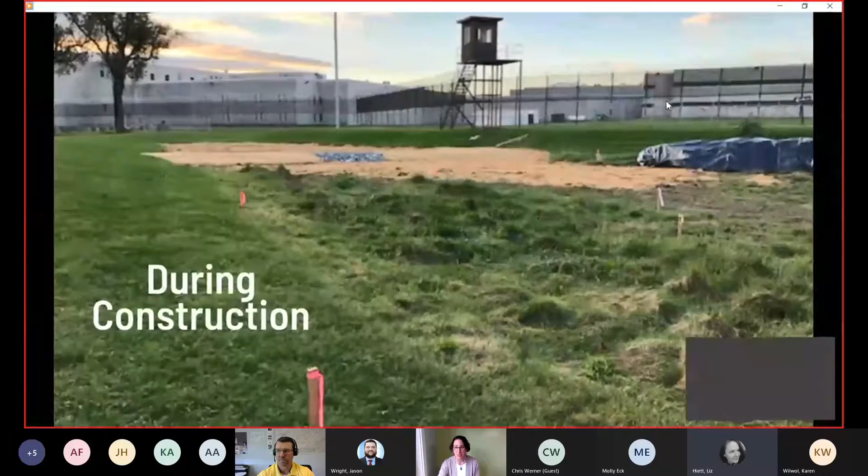I don't know what you're seeing, but this isn't quite the video we had sent in. So how about we just forget about the video and go on with the presentation? Is that all right? Yeah, that seemed fine, to be coming through very well. Okay. Yeah, I'm not sure how we mixed up the presentations, but yes, if you'd like to go ahead with your presentation.

Oh, was that not the one? That was the one we have from you guys. It was our video, but it wasn't playing correctly at all. It was just playing the first two slides over and over again. Oh, huh. It looked good on my end. On mine, yeah, it was good. Maybe it was your connection. Sorry about that. Can end it if you want, whatever you want. It was an awesome video. Can you play it again? Sure. Yeah, Lindsay worked so hard on it.

Okay, here we go. Lindsay, you need more bandwidth. Do you want me to start it from the beginning or where we were? Yeah, start it over. Okay, hold on one second. Thank you. Hold on one second. I like the music too. The music was getting me going.

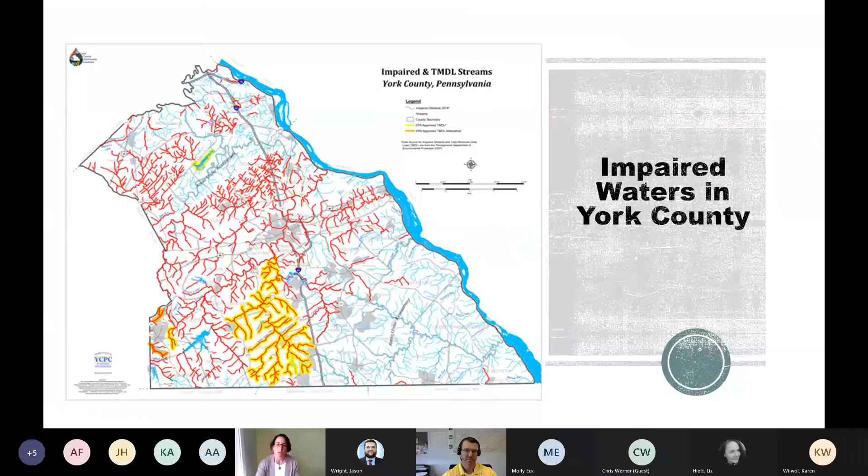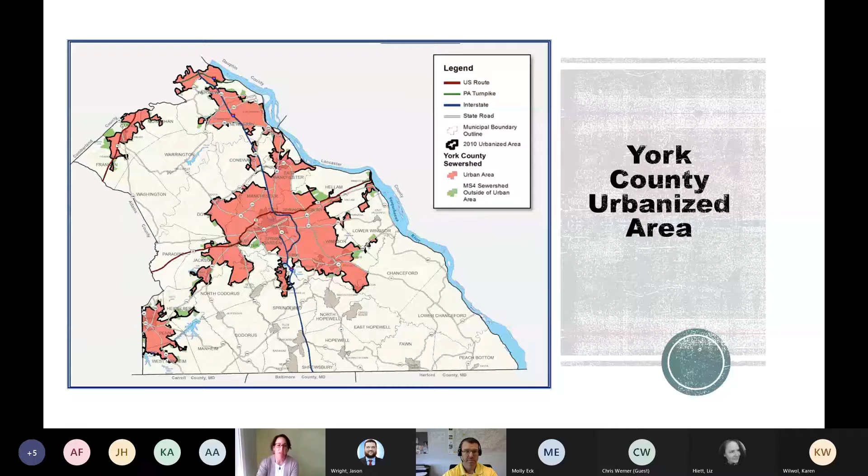So looking at that, we'll go to the next slide. In our urbanized area, all of our municipalities that had to have an MS4 permit and were required to do a Chesapeake Bay pollutant reduction plan, we decided to do a regional plan.

If you go to the next slide, with our regional CBPRP for the first one, there were 43 MS4 municipalities, and the county also had a permit and was required to do a CBPRP. Most of those municipalities participated, and the county was looking at ways we could contribute positively to reduce our reduction.

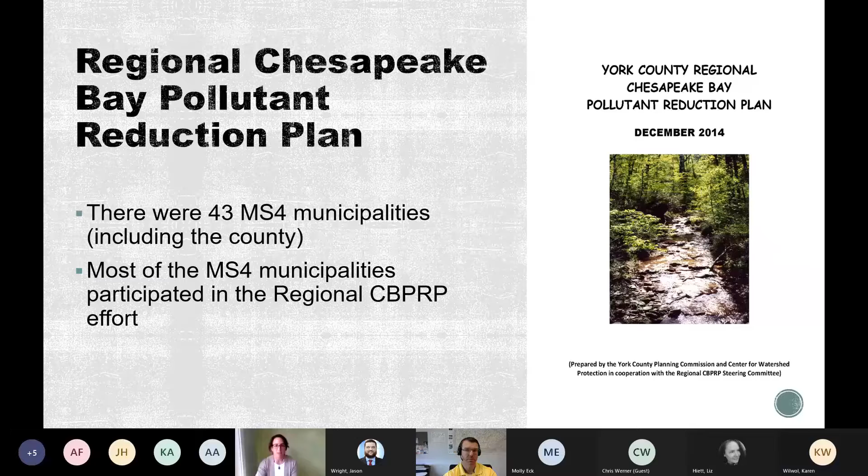Next slide. We had seven properties located in MS4, or we owned properties in 7 of the municipalities that were participating in the CBPRP. The reason for our MS4 permit was some outfalls, and the only population we really had was the prison. So we formed a committee to help with our MS4 permit and all of our MCMs.

We worked together with our facilities management and their staff. It was the YCPC; we had the county engineer involved, and our most significant place where we owned land and had basins and outfalls was the prison. So our prison staff was also involved in our committee. We looked at where we could make a difference, and next slide, we decided it was the prison.

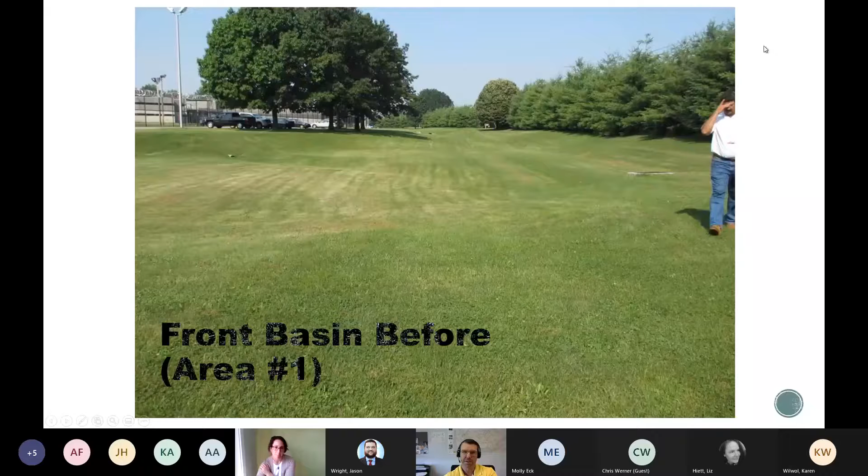I just noticed that cameo appearance by John Seitz there on the side of the picture. Yes. So yeah, Seitz was on our committee.

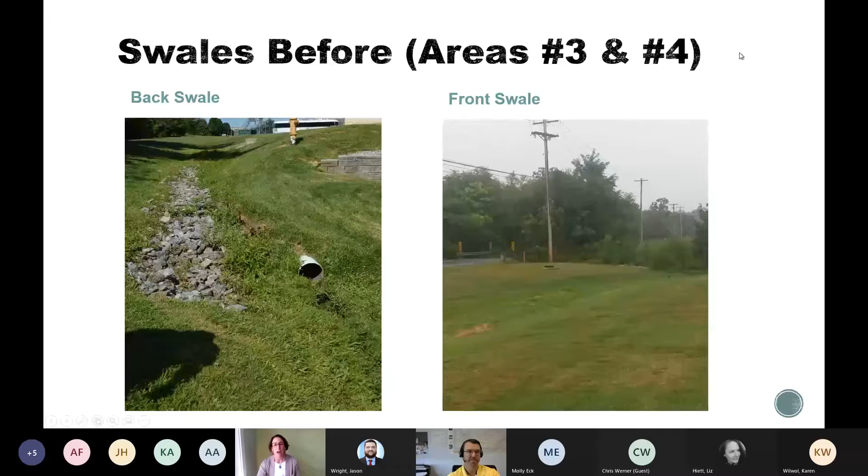And so our goal—the picture on the left was the back swale that was actually leading into the first basin—as the Planning Commission, next slide here, was to hopefully eliminate the need for our MS4 permits, the ultimate goal. If we could reduce or eliminate those discharge points, or at least be proactive in eliminating some stormwater and pollutants going into our streams.

So here's the timeline. It's a pretty lengthy process. In 2014, we had the CBPRPs. That's when we adopted it.

2015, the next year, we applied for the DEP Local Stormwater BMP Implementation Grant. The next year, the grants were awarded. Fun little fact, the awardees were talked about at the prison, so that was kind of fun.

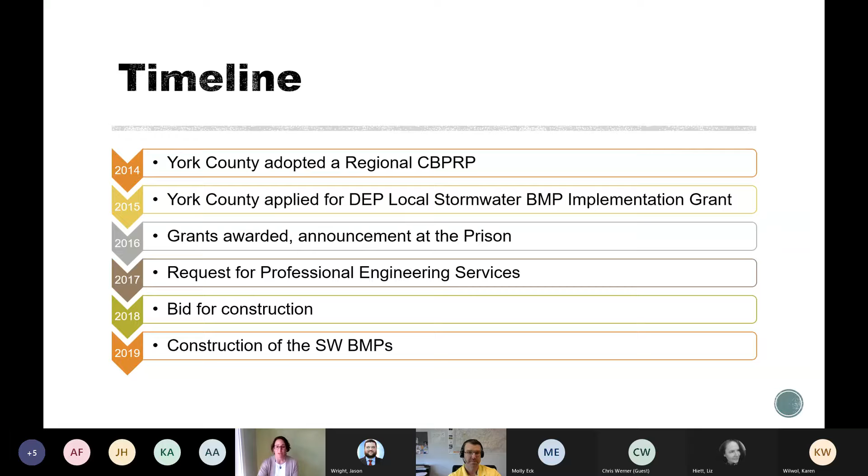Obviously, removing the pilot channels was one of the key factors in the project approach, to increase the residence time, lengthen that flow path within each of the basins, but also to create some more native plantings and additional capability for the basin for evapotranspiration and water quality treatment, which were really the driving factors. I'll get into that a little bit more as I go through my part of the presentation.

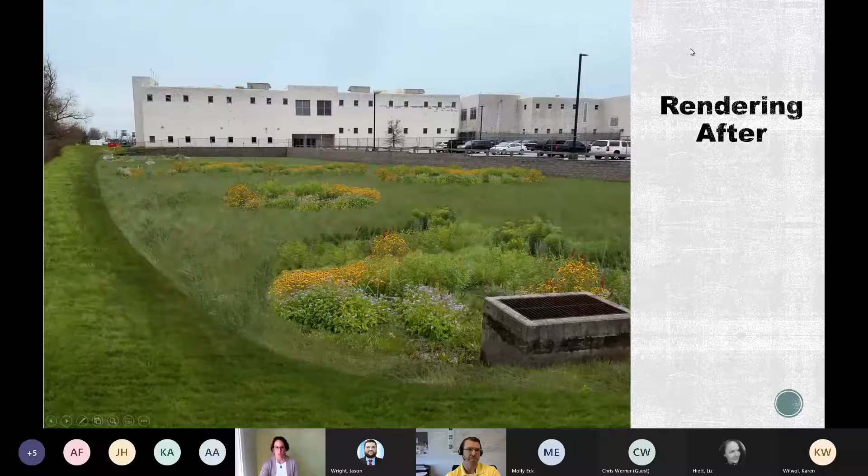Lindsay kind of talked about York County, but just a little bit more zoomed in on the location of where the prison is. Interstate 83 comes around the east side of York, and the prison is just east on Market Street, East York. So we are in Springettsbury Township, where the prison is located.

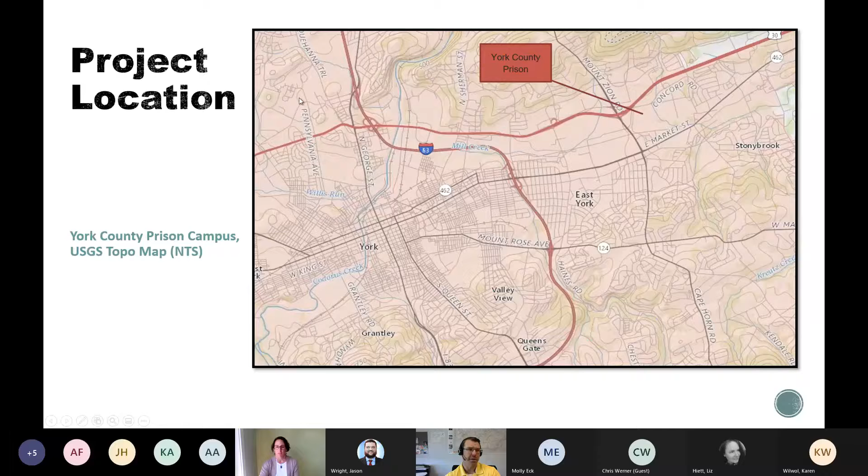It's a pretty large campus that the county owns that actually goes all the way over to Pleasant Acres, where the old York County nursing home once was. So it's a big campus in Springettsbury Township.

The areas of retrofit included in the project, as we got started, I think there was a little bit of a shift from the grant application. Once we got on site and started doing some research, field investigations and assessments, we really landed on these 4 areas, which Lindsay had already introduced at the beginning of the presentation.

Area 1, the front basin, is this area at the north side of the prison property. It was a pretty long triangular shaped basin, strictly detention only, no water quality treatment. I believe the construction of this was sometime in the late 90s, early 2000s. It might have been expanded as well. There was a single overflow structure that discharged past the cemetery downstream.

There's a cemetery here, which was a neat site characteristic, but also down here to area 3. So area 1 discharges to area 3, and then it comes into the unnamed tributary to Kreutz Creek, which Lindsay already mentioned has a Chapter 93 warm water fishery.

The back basin, area 2, I would best describe as kind of a football field looking basin. It'd be great for a pitch to play some soccer on. Turf grass was the primary cover there. Two pilot channels from two separate inflow locations, and then the singular riser structure for overflows and hydraulic controls discharged into a channel that tied into Kreutz Creek.

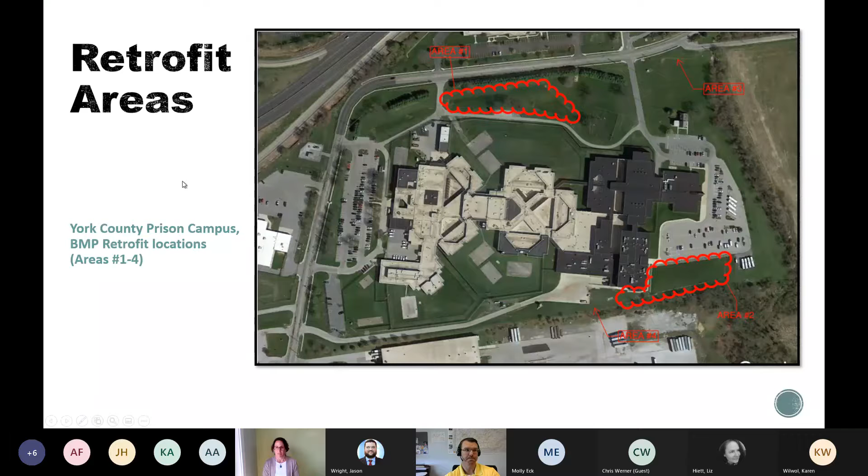For the project approach, really it was to do no harm. We wanted to enhance the basin storage volumes, but didn't want to affect the hydraulics of the system. To keep things moving from a permitting perspective and control costs, we looked at the existing hydraulics of the facilities, the riser and overflow structures, and determined they were still functioning as intended. So the main goal from an excavation perspective was to enhance and create more areas for excavation and shallow infiltration, not incorporate fill or take away from existing storage volume within these basins. We also wanted to maximize surface infiltration.

So on the next slide, our design approach for area 1 and area 2 was to create some micro topography with shallow ponding areas - basically small rain garden areas within the overall larger detention facility, to create retention time and additional travel time through the facility from inflow to outflow.

Another key factor on the project was to install low height vegetation. We now know that if you don't maintain a stormwater basin, low height vegetation can get pretty tall, but we took into consideration the height of the proposed plantings and went with an upland meadow seed mix, as well as a lowland rain garden seed mix in the depressional areas, to try to manage that.

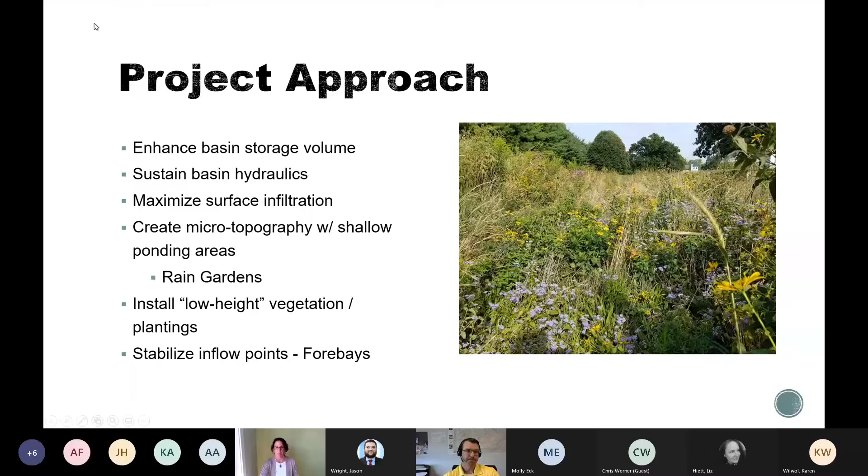Lindsay, jump in here at any point if you want. You're doing great.

All right, so area number 1, which is the north basin, the front basin along Concord Road, was that long triangular basin, like I said. Really the approach here was to put inflow forebays with rock windows to flow through and filter any floatables into the downstream conveyance areas.

This was actually a mildly sloping channel that came down to the basin bottom. Looking at this, we enhanced this area and created some shallow ponding as well as a longer flow path by incorporating these micro berms. You'll see this photo of a micro berm with a flow-through weir to control any erosion that might occur in the center of that berm during really intense storm events.

So we created 2 ponding areas - a micro forebay, shallow ponding rain garden areas, as well as other depressional areas down towards the outlet structure. This was also a depressional rain garden for any flows that came in through the grass-lined channel from the east side of the campus.

So really, mostly excavation. We increased the storage capacity of the basin, minor filling but accompanied by major excavation, and really a net increase in storage volume, to do no harm to the hydraulics of the system.

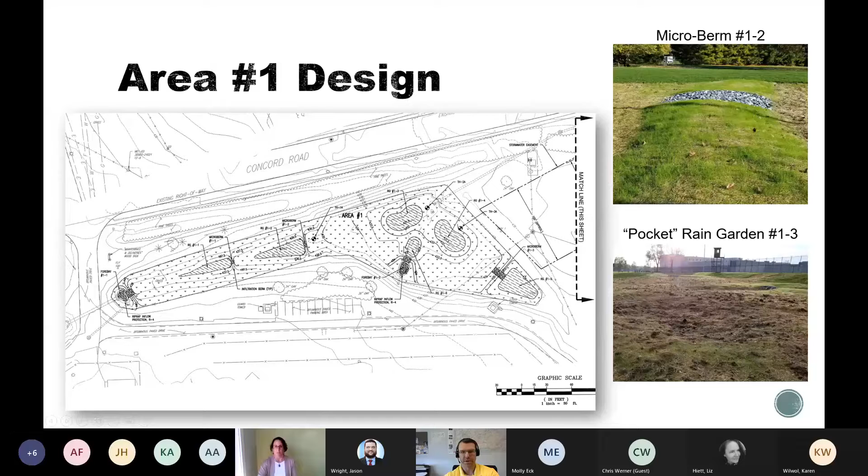The back basin had a similar approach. This forebay ended up being a fairly large forebay area, due to the size of the drainage area - there's a lot of impervious area that drains back to this corner. There's an outfall here to the channel, and then another roof drain outfall that comes in. I believe this back basin has a drainage area of about 20 acres, and almost half of that is impervious.

So 10 acres of impervious surface with a travel time of probably a minute or two from the time the water falls on the roof till it gets down into here. So very, very flashy peak flows coming out of these inflows into this area, and this forebay here sees a lot of flow.

One thing we actually did during construction, we had a rain event—we had a lot of rain events during construction, I'll get to that in a bit. We had one rock window, as shown on the plan here, proposed. The flows and peak flows we had during construction actually started to erode another spot on this side. So instead of trying to force all the water one way, to keep it going in the path of least resistance, we added a second forebay window on this side. Now this forebay functions with two flow-through windows to increase capacity for those really flashy peak events coming in here.

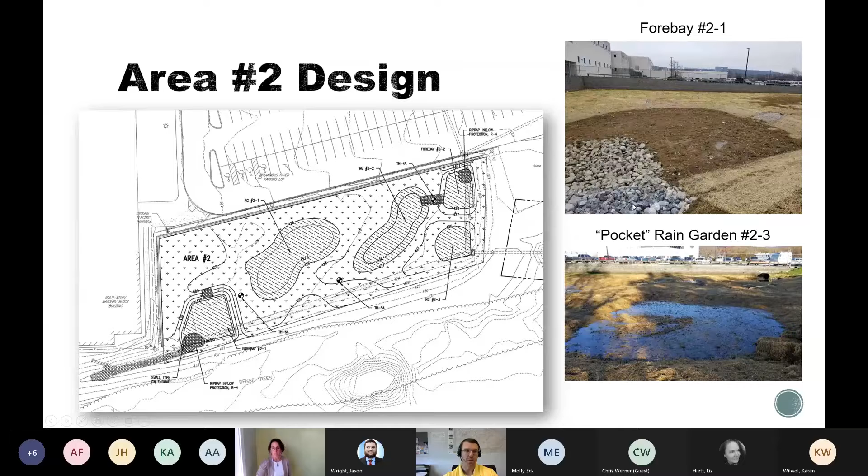So you can see we have two larger rain garden micro-pool areas set up. We also have another inflow with a forebay here, and then the water eventually makes its way down to the outfall rain garden. This photo was taken during construction after a pretty intense rainfall event—you can see the ponding occurring with the riser structure just off to the right. It really is functioning as intended. We're seeing a lot more residence time, water quality improvements, and infiltration occurring that, for smaller storm events, previously the water would just come in and go out through the pilot channels without any residence time or water quality treatment as part of the stormwater management.

For project coordination, it wasn't a huge project, but there was a lot of coordination that needed to occur. Lindsay had already mentioned the project sponsor team of prison officials, county staff, the Planning Commission, and JMT.

Because of the size of the earth disturbance—the amount of acreage, I believe we were over 2 acres of disturbance—we worked with the York County Conservation District to get an NPDES authorization. Fun fact, there was actually an NPDES permit already open on the prison campus, which we weren't aware of until our pre-app meeting with the Conservation District. So we ended up doing a permit amendment to that NPDES authorization and tucked this project in under that previous permit that was still active on the campus.

From a municipal perspective, we worked with Springettsbury Township to gain stormwater management review and approval, and we worked through that process. Then with PADEP, as part of the grant funding requirements, we worked with them on a post-construction walkthrough of the site.

Some other notable coordination, which I thought was really unique and interesting to me: there's a very large natural gas line that runs along Concord Road, just adjacent to this swale. I believe they're 20 to 30 inch force mains, a couple of them.

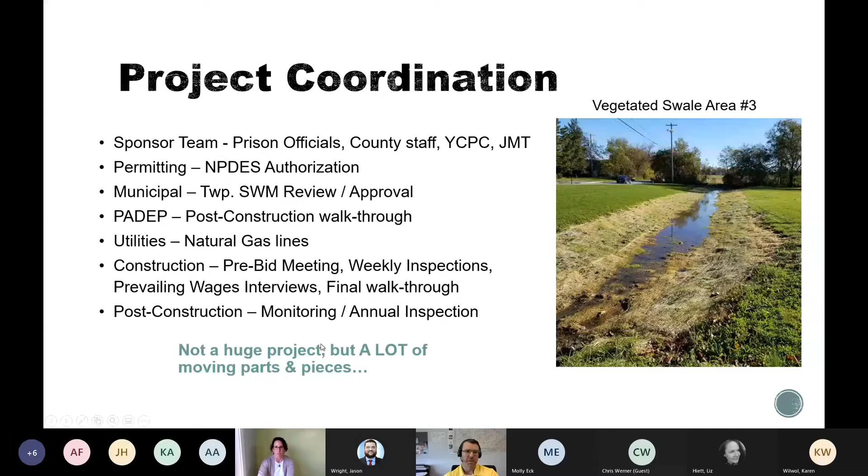Once you put these projects in the ground, you really have to keep an eye on them and make sure you're monitoring and keeping tabs on them through an annual inspection protocol, which the county has done. So in summary, not a huge project, but definitely a lot of moving parts and pieces to keep track of.

A few project challenges I wanted to go through to give you more perspective on the site. I talked a little bit about site access and security—being on the site of a county prison certainly adds unique challenges to the project. We talked about the vegetation and even just getting on site, making sure everything was coordinated ahead of time so there weren't any surprises for the folks at the prison and facilities.

Wildlife—there's a large Canada geese population at this site, and our retrofits have actually been helping with that. The geese don't like the vegetative, non-manicured vegetation areas, so the actual basin proper areas have kind of helped. We haven't had the goose issues we had prior to construction, although they're still nearby in other areas of the campus.

There was some rock excavation in area 2. You can see this photo with a large boulder that was encountered. There were many more of those—something we weren't expecting—but the contractor was able to make it work, work around it, and incorporate and remove those as necessary.

Dewatering—this project was constructed in the fall of 2018, and if you remember, fall of 2018 was a pretty rainy time here in South Central Pennsylvania. I checked back on the rain gauges because my memory had gotten a little foggy on how much rain we actually had. I checked the Springettsbury Township rain gauge close by the project site, and there was over 20 inches of rain that fall in September, October, and November—exactly when these basin retrofits were being constructed. October and November alone had 13 inches.

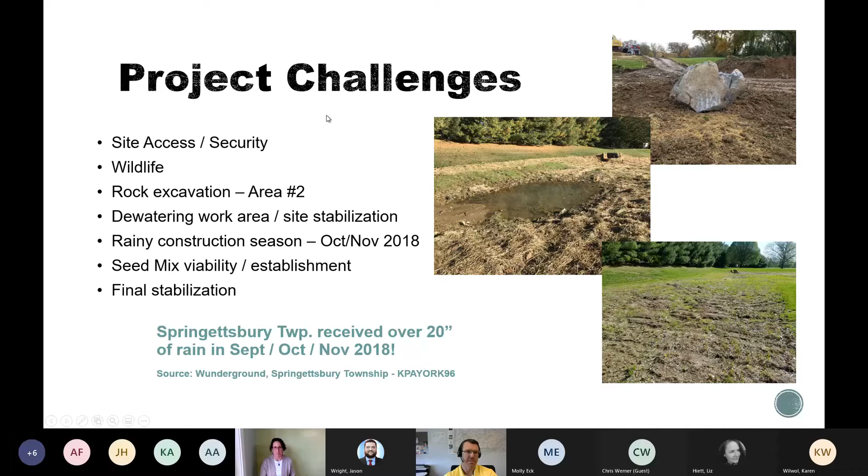Seed mix—seed mixes want to float whenever it rains and comes into a basin, so the contractor was up against that and had to reseed because they lost some of their seed mix. We also had some issues with establishment—I know there was a rogue worker who might have jumped into a lawnmower and mowed the basin bottom in area 1 before they were supposed to. You can see this photo in the bottom right with tire tracks in the bottom of the basin that had just been established and was just starting to germinate after springtime.

In summary, we had two basins retrofit for the project. There were 9 pocket rain garden areas, low depressional areas, that were installed. We also installed 3 forebays—2 in the back basin, 1 in the front basin. The 2 inflow and outfall channels for the facilities were stabilized as well, and for MS4 TMDL credits, applied to the York County joint PRP that Lindsay talked about earlier, we had over 10,000 pounds per year of TSS, plus some nitrogen and phosphorus that could also be applied.

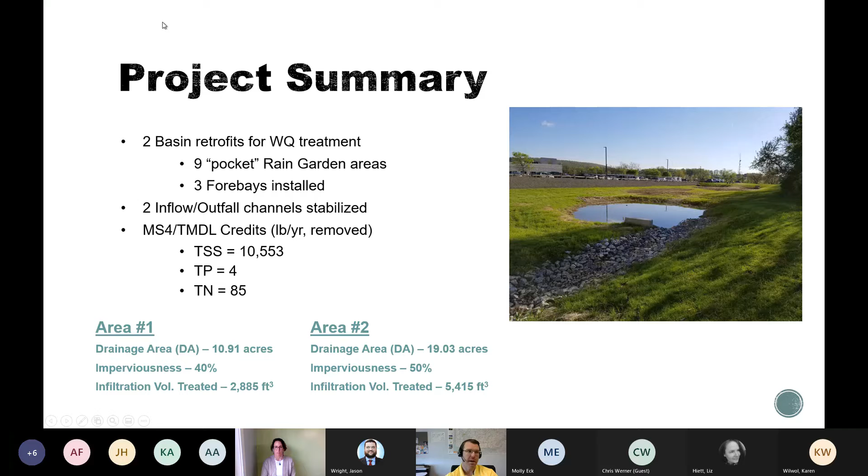Here's the statistics for the two drainage areas—almost 20 acres to area 2, 10 acres to area 1, highly impervious at almost 50%, with quite a bit of infiltration volume treated at both facilities. These are just a few construction photos I'll flip through as we wrap things up.

Here's some rock excavation happening in the back basin, the installation of the new end wall where the roof drain came off the building, and there was just a pipe end, a straight pipe previously. This is also the back basin construction activities in the rain garden.

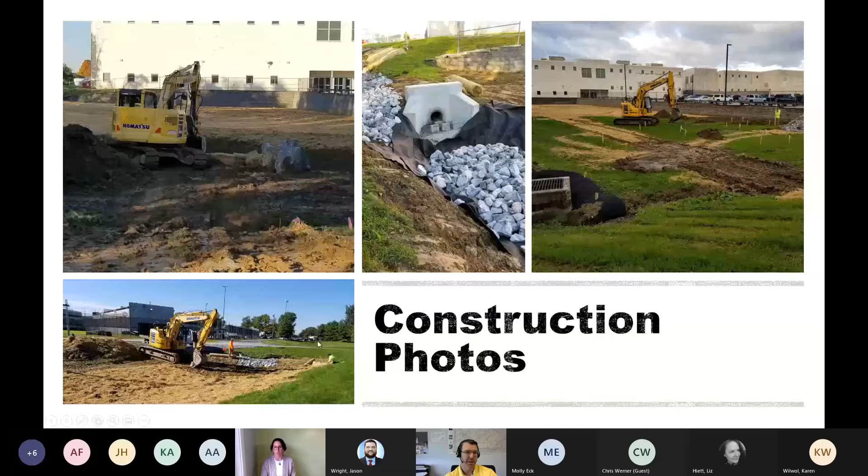You can see the erosion and sediment controls here that we worked with the conservation district to develop, something that would work to keep the sediment from going out the low flow orifice in the riser structure. And then there's forebay construction at the front basin.

So just a few more action shots from erosion sediment control installs. One thing I didn't mention was the contractor on the project, Ecotone, incorporated out of, I believe, Falston, Maryland. They did a really great job, really great to work with, so appreciate everything they did on the project as well.